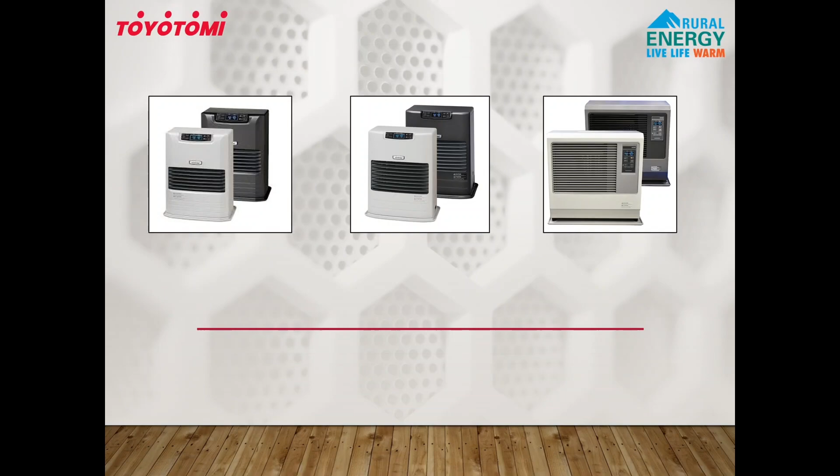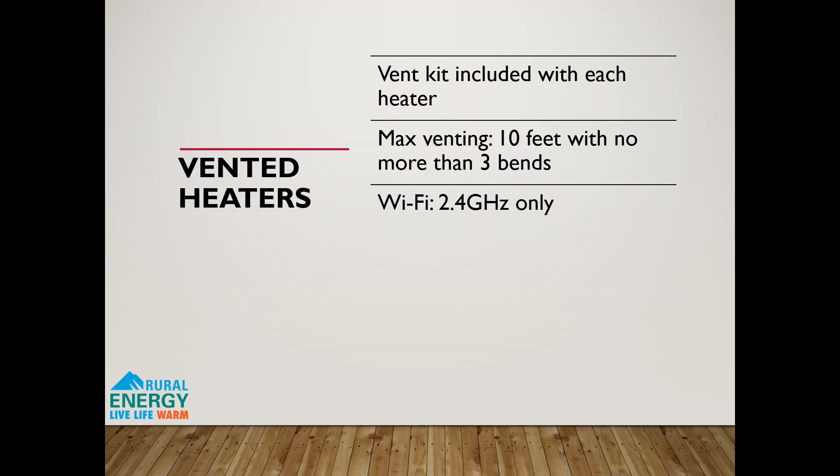Let's get started with our most popular line, the vented heaters. Toyotomi vented heaters offer safe, reliable, and efficient heat for various room sizes. Each heater includes a vent kit and supports venting up to 10 feet with no more than 3 bends. Wi-Fi capability is available, but only on 2.4 GHz networks; 5 GHz networks, including your phone's hotspot, will not work. Your customers can choose from 2 clean, modern colors, off-white or graphite. Fuel options for Toyotomi heaters include 1K kerosene, low sulfur number 1 fuel, ultra-low sulfur diesel, and ultra-low sulfur heating oil. Any use of other fuel types will void the warranty and shorten the life of your heater.

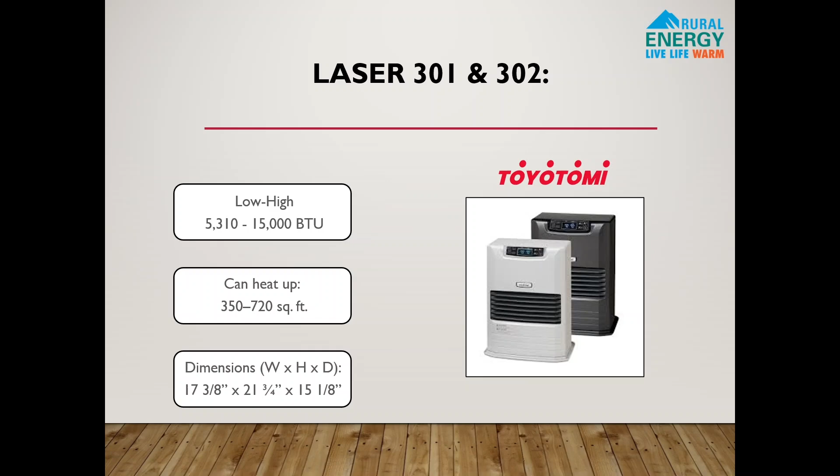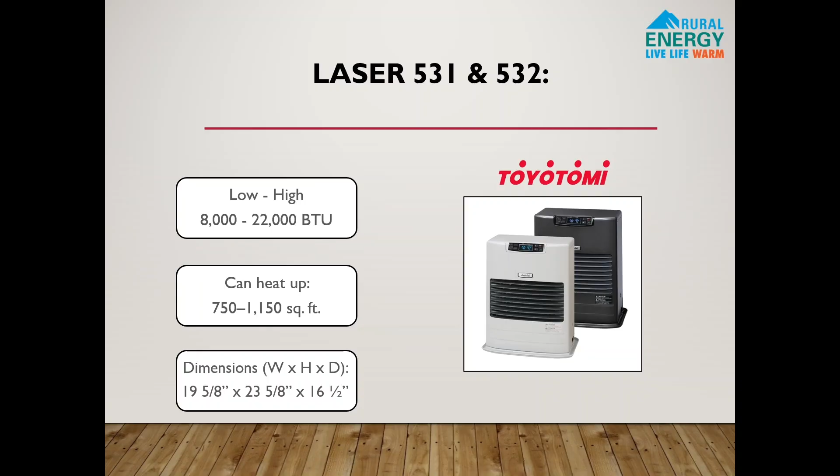Now let's break down the models by performance. The Laser 301 and 302 can do 15,000 BTU per hour on high and can heat a room size of 350 to 720 square feet. The Laser 531 and 532 will fire up at 22,000 BTU per hour on high and heat up room sizes between 750 and 1,150 square feet. The Laser 731 and 732, the biggest of them all, will fire up at 40,000 BTU per hour on high and can heat up spaces between 1,400 to 2,000 square feet.

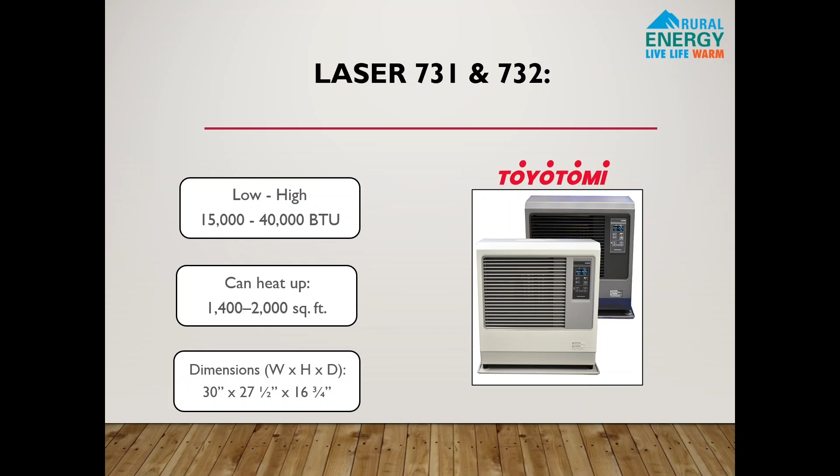There are new models coming soon: the 303 and 304, the 533 and 534, and the 733 and 734. These models are now launching with Bluetooth capabilities and fully replacing their original models. A new main control board and an upgraded Wi-Fi module that supports Bluetooth capability will be installed in these units, so they will not be interchangeable with older models. Please contact your nearest dealer for any updates or additional changes.

The Laser 60AT bridges the gap for mid-sized spaces. It runs at 30,000 BTU per hour on high, which makes it perfect for spaces between 950 to 1,500 square feet.

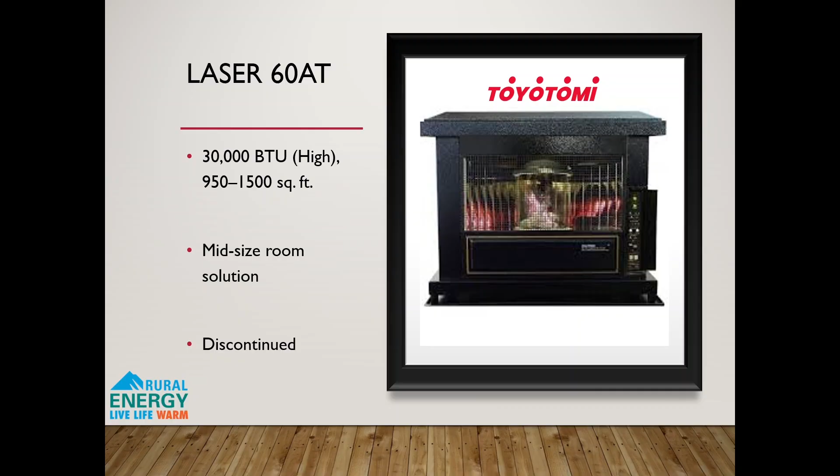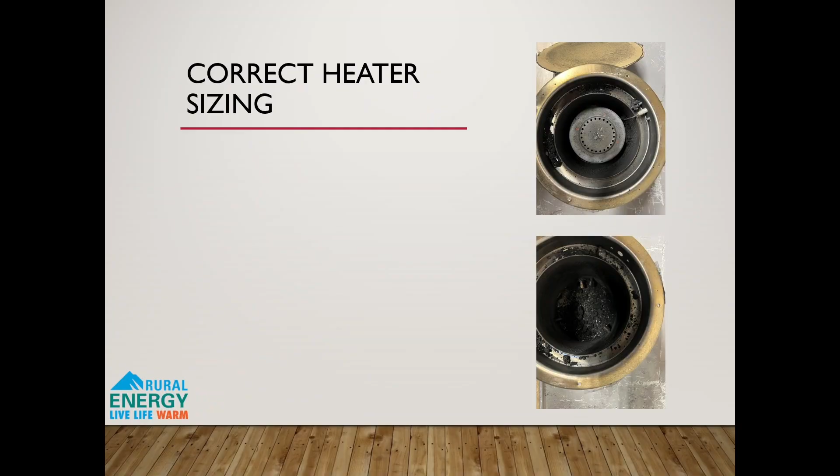Heater sizing: when it comes to sizing a heater, bigger isn't always better. Oversizing or undersizing a unit can actually shorten the life of the heater and create problems for the customer. So what should you look at when helping someone choose the right Toyotomi heater? Key factors include the local climate, the size of the home and the quality of its insulation, air infiltration needs, appliance efficiency, and of course, the comfort preferences of the people living there.

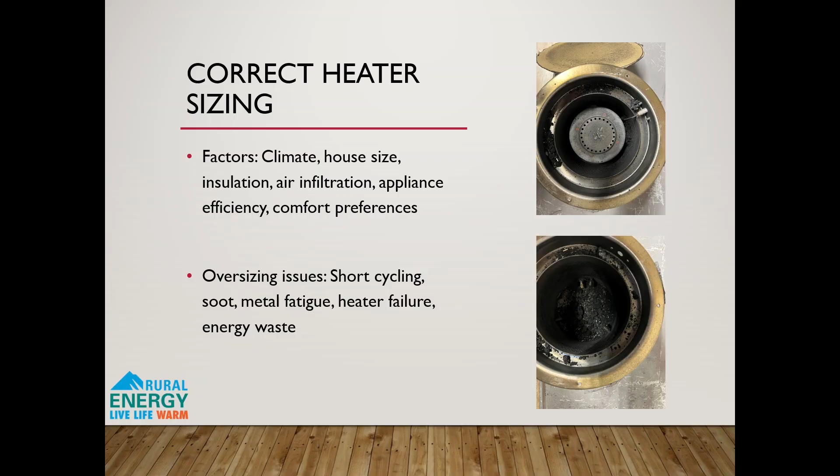If a heater is oversized, it tends to short cycle. That means more soot buildup, more wear and tear on the heat exchanger, wasted fuel, and higher energy bills. That's not good for the customer or the heater. And here's something important to remember: you do not need to oversize a Toyotomi heater for colder climates. Even at minus 40 degrees, the BTU drop is less than 4%.

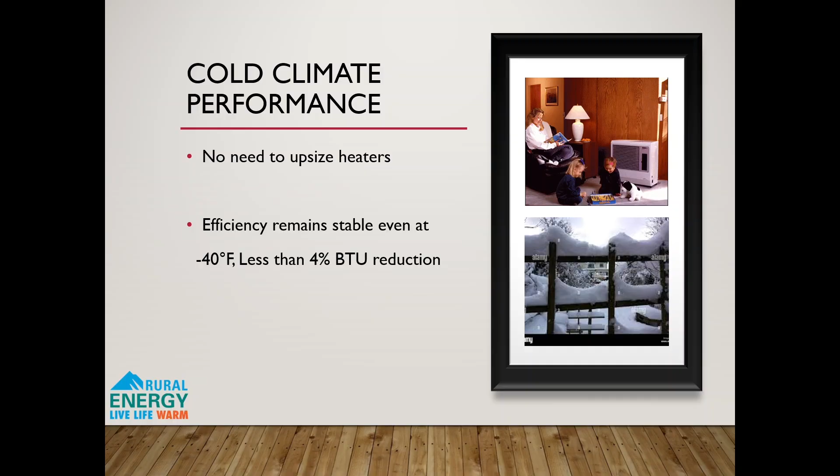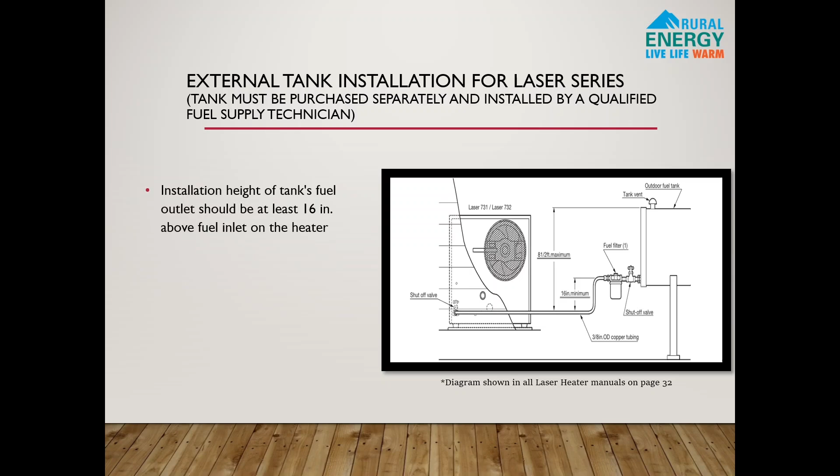External oil tank installation for the Laser series. When installing an external fuel tank, it's important to follow proper guidelines to ensure both safety and efficiency. First, the installation height matters. The fuel outlet of the tank must be at least 16 inches higher than the fuel inlet on the heater. This ensures proper fuel flow.

Next, pay attention to the tank height. The top of the fuel tank should not exceed 8.5 feet above the floor surface where the heater sits. Going beyond this can create pressure issues and improper fuel delivery. Finally, safety clearances must be respected. The fuel tank should be placed at least 6 feet away from all heat sources. This minimizes the risk of fire hazards and ensures compliance with safety standards.

By following these 3 guidelines—fuel outlet height, maximum tank height, and safe distance from heat sources—you'll help guarantee a safe and effective installation.

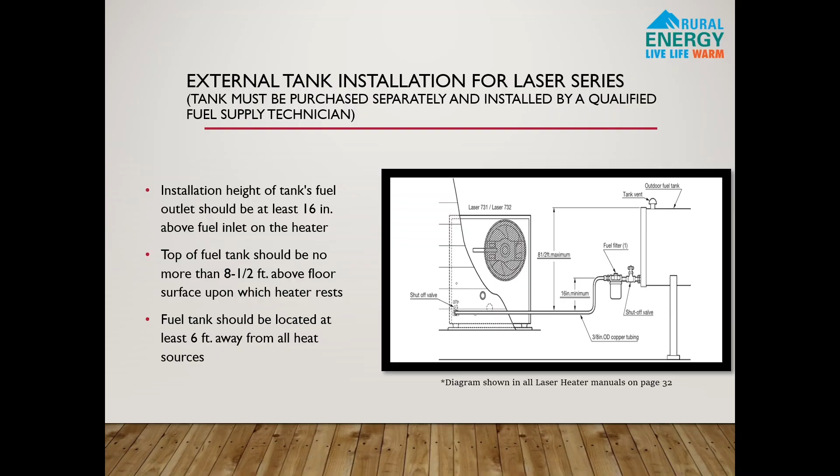Required installation items: for a full installation, a few items must be purchased separately. 3/8 inch outer diameter copper tubing, or 1/2 inch if the fuel line run is longer than 50 feet, a water block fuel filter like the Goldenrod 496, and a safety shutoff valve.

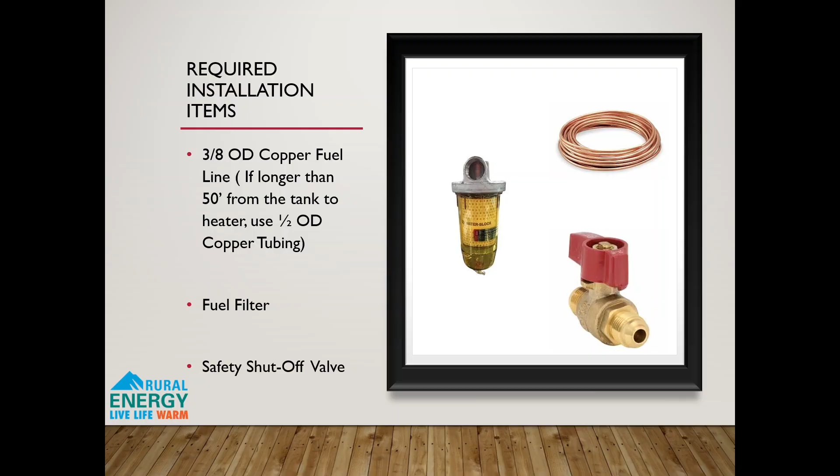Optional parts and accessories: every installation is a little different. Some customers will need longer fuel lines, others will need more exhaust pipe. That's why Toyotomi offers a range of accessories, including pipe extensions from 9 to 24 inches, flexible extension pipe which allows the exhaust to be relocated higher or further along the wall, flue pipe extensions ranging from 12 and 5/8 up to 78 and 3/4 inches, and the lifter pump, which helps deliver fuel to heaters installed upstairs or higher than your fuel tank.

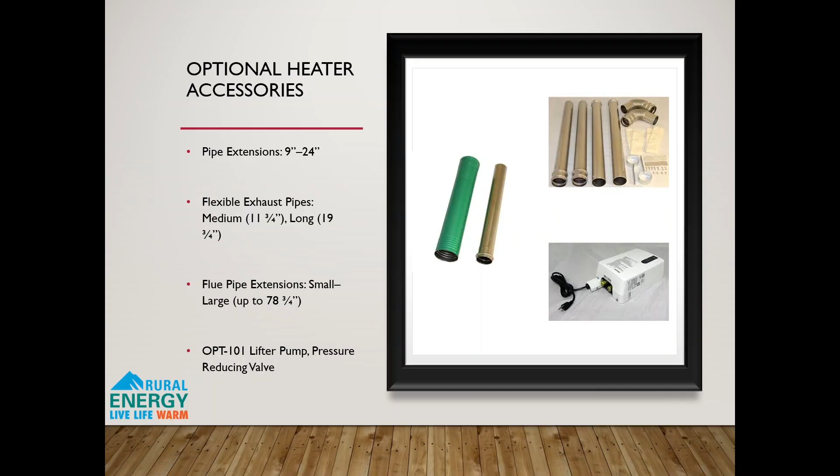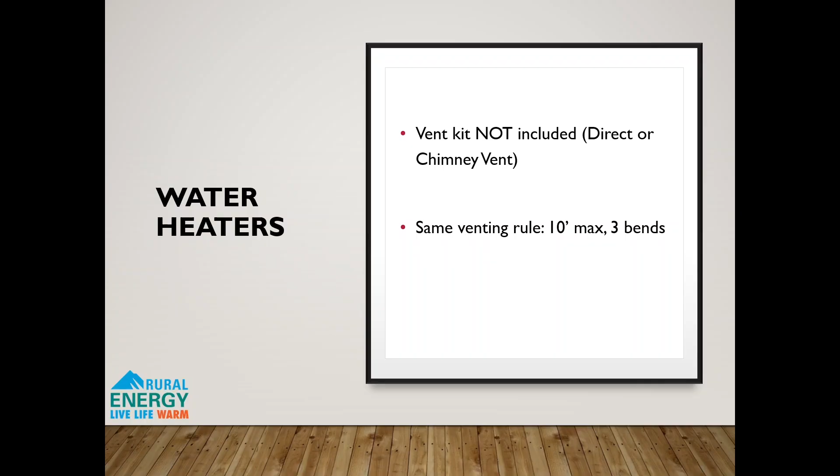Alright, let's move on to water heaters. Unlike the vented heaters, these don't come with a vent kit in the box. You'll need to grab either a direct vent kit or a chimney vent kit, depending on your setup. The good news is the venting rules are the same: no more than 10 feet of pipe and no more than 3 bends if you're going with the direct vent option. Keep it simple and you'll be set.

Now, these models don't have Wi-Fi or Bluetooth, but here's the thing: they're not about fancy extras. They're built for performance and reliability.

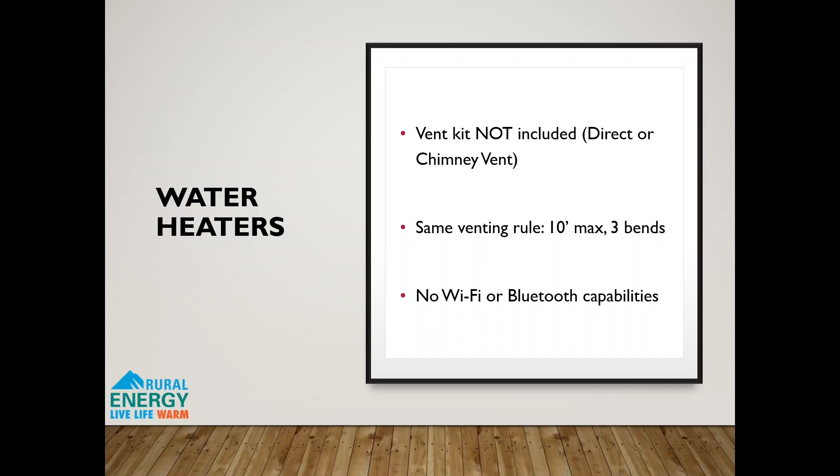When it comes to fuel, you've got 3 approved choices. The first is 1K kerosene. The second is low sulfur number 1 or number 2 fuel oil. And the third is ultra low sulfur diesel. And here's a big one: just like with the vented heaters, using anything else is going to void your warranty and shorten the heater's lifespan. So stick to what the manufacturer recommends—it will save you a lot of headaches.

Every installation is also going to require a fuel filter, a relief valve, 3/8 copper tubing, a safety shutoff valve, and either a flue pipe installation kit or a chimney adapter. These aren't optional. They're part of doing the job right.

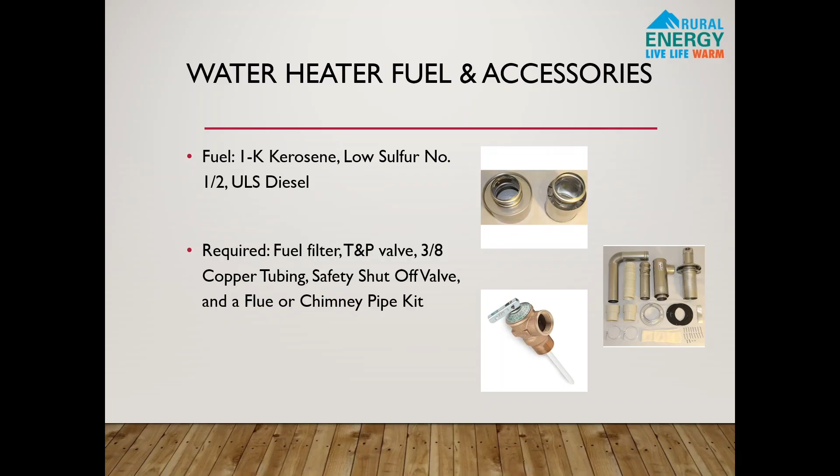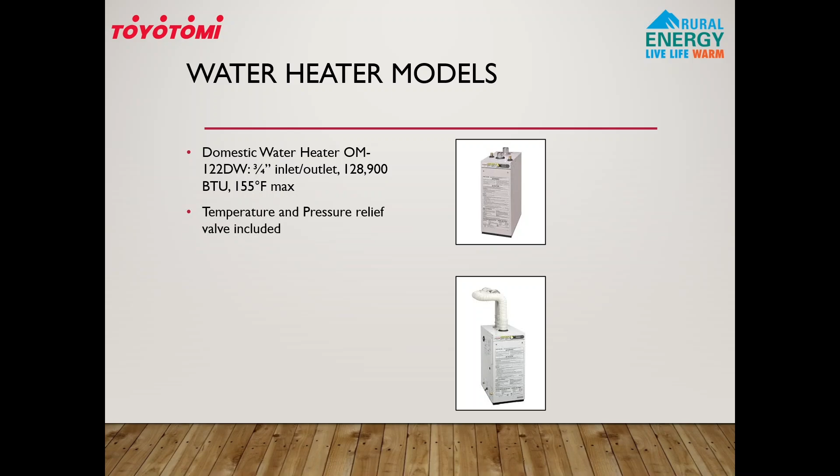Now, let's talk models. First up is the OM122DW domestic water heater. This one comes with 3/4 inch inlets and outlets right at the top of the unit. It packs 128,900 BTUs of heating power, so you'll have no problem meeting your hot water needs. It also includes a temperature and pressure relief valve that pops at 150 psi and a temperature control with a maximum setting of 155 degrees Fahrenheit.

Next, we've got the OM128 Hydronic heater. This one has a few key differences: the inlets and outlets are 1 and 1/4 inch, and they're located on the side of the unit instead of the top. The BTU output is the same, 128,900 BTUs, but you get a higher maximum temperature of 175 degrees Fahrenheit, making it perfect for hydronic heating applications.

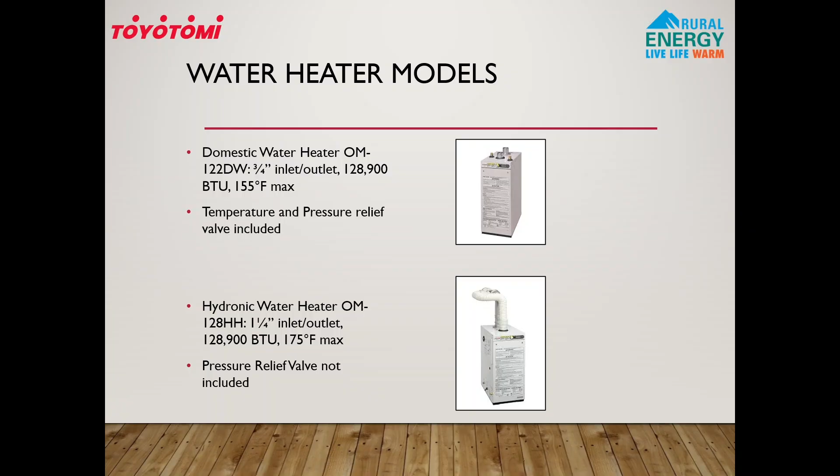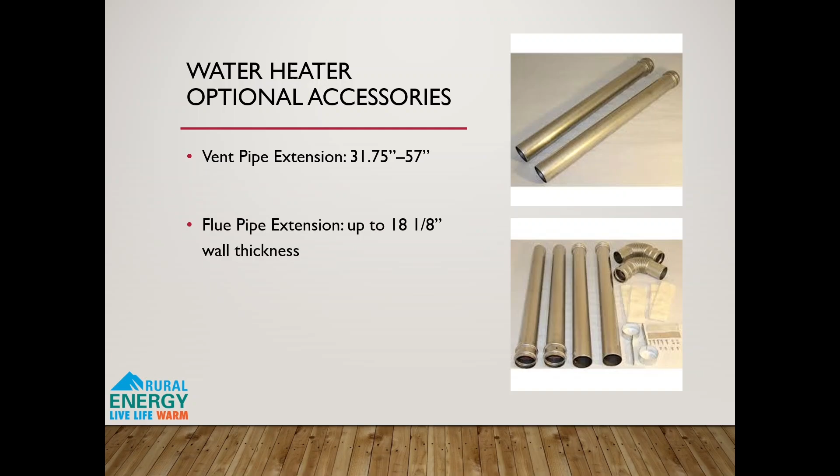It is also important to note that this hydronic heater does not come with a relief valve, so purchasing a pressure relief valve with a max pressure rating of 30 psi will be needed. You may also need some optional accessories such as a vent pipe extension that adjusts from 31 and 3/4 inches to 57 inches, or a flue pipe extension designed for wall thicknesses up to 18 and 1/8 inches.

Alright, let's shift gears and talk about external fuel tanks. This part is important because how you set up the tank will affect how well the heater runs. First off, tanks aren't included. You'll need to purchase one separately and have it installed by a qualified fuel supply technician.

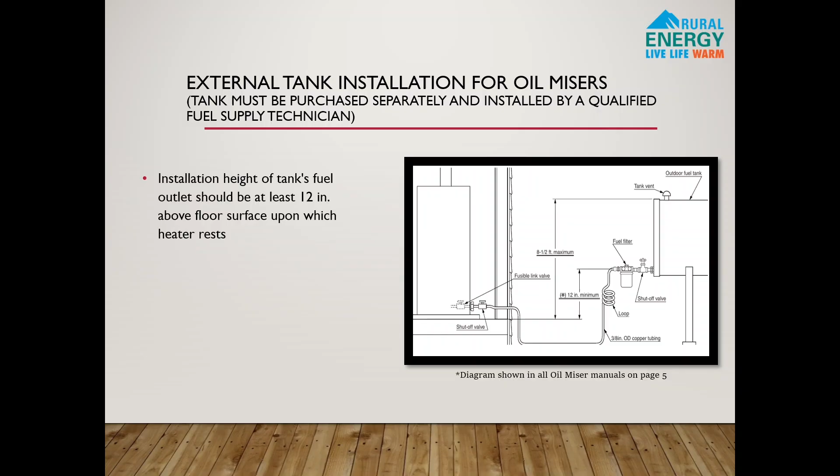Here are the key rules to remember. The fuel outlet needs to be at least 12 inches above the floor where the heater sits—that little bit of height makes a big difference, it keeps fuel flowing smoothly. The top of the tank should not be more than 8 1/2 feet above the heater base; anything higher puts too much pressure on the system. And finally, safety first: the tank must be at least 6 feet away from any heat source. That's non-negotiable. Follow these simple guidelines and your fuel delivery will stay consistent. Your system will run safely and you'll avoid unnecessary strain on the equipment.

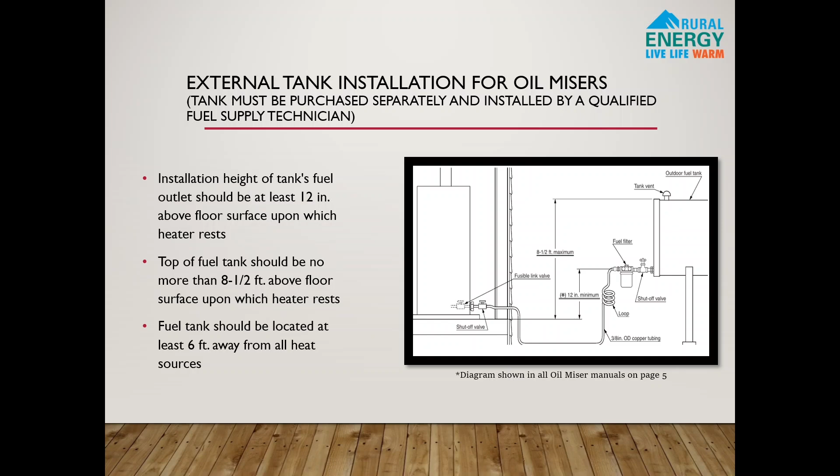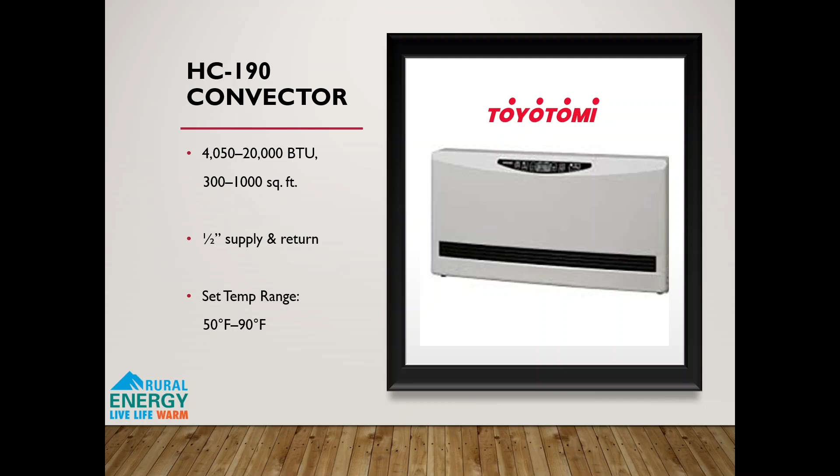Last but not least, the HC190. For customers who already have boiler systems, the HC190 is a smart choice. It's efficient, compact, and designed to deliver steady comfort. It puts out between 4,050 and 20,000 BTUs, which makes it perfect for heating spaces anywhere from 300 to 1,000 square feet. The unit needs a 1/2 inch supply and return, and you can set the temperature anywhere between 50 and 90 degrees.

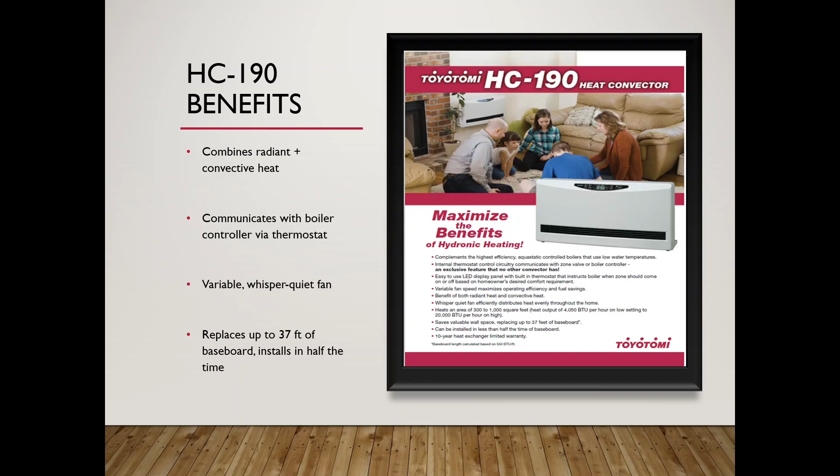What makes it stand out? The HC190 combines both radiant and convective heat, giving you the best of both worlds. It comes with a built-in thermostat that can communicate with zone controls, and its variable fan speed helps save on energy costs. Plus, it runs whisper quiet, so you'll hardly notice it's on. Another big win is the space it saves—one HC190 can replace up to 37 feet of baseboard, and it installs in about half the time.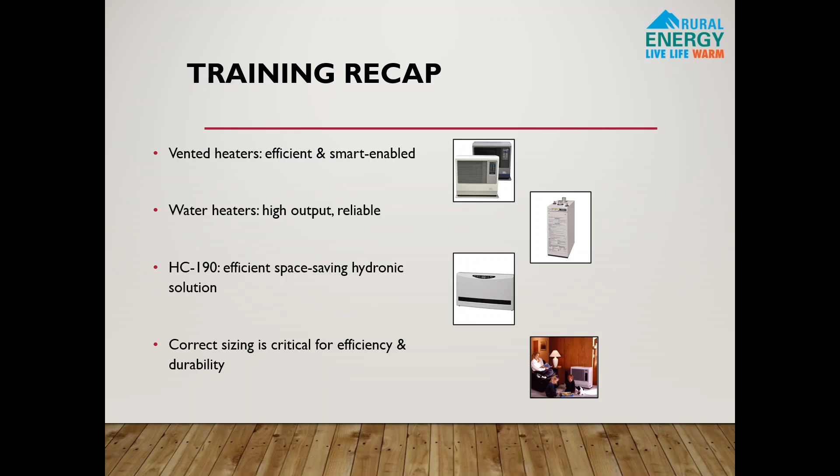So let's bring it all together. Vented heaters are powerful, efficient, and smart-enabled. Water heaters and hydronic systems provide high BTU output with reliable performance. And the HC190 convector, it's a space-saving, efficient add-on that pairs perfectly with boiler systems. And remember, getting the right size, venting correctly, and choosing the right accessories are what make the difference between an average install and a great one.